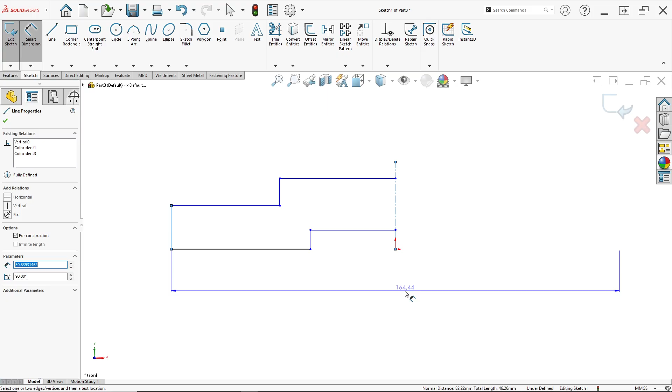We start drawing the first part here, the base plate. Start from the front plane, right click and click sketch. Draw a center line here to here, then select line and draw the shape. Set the total length dimension to 128 millimeters, so this to the center line is 128 millimeters. This line to the center line has a distance of 38, and this edge to this edge is 50 millimeters.

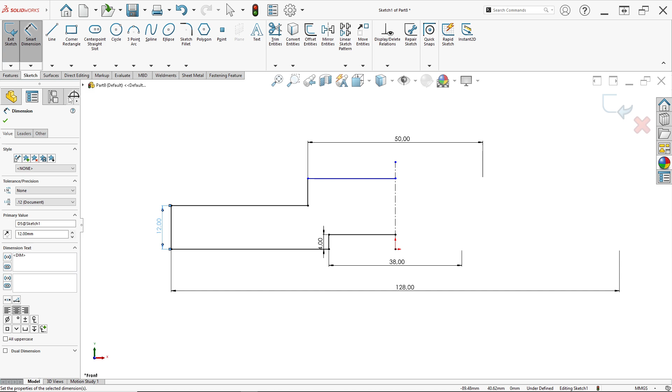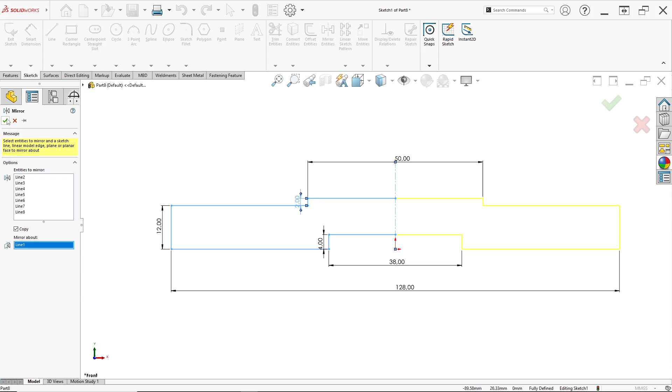This edge has a height of 4 millimeters, and this has a thickness of 12 millimeters. This line is 12 millimeters. Click OK, and the last dimension here is 2 millimeters. Click OK. We just sketch half of this part because after this we can use mirror entities. Click mirror, select all the lines, left click and hold, mirror about the center line, and click OK. That's the first step, it's simple.

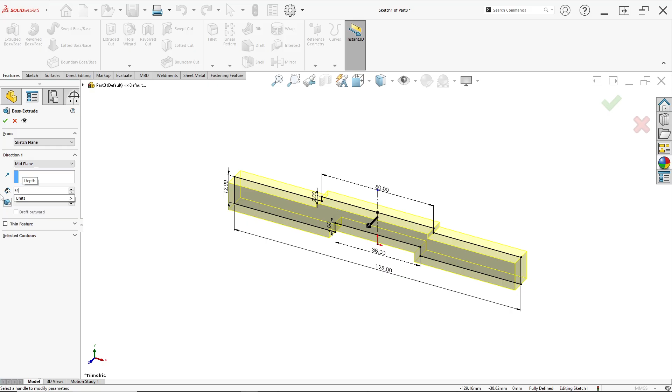After that, select feature and click extrude boss or base. For direction, ensure mid plane is selected for symmetry, and the total thickness here is 54 millimeters. Input 54 millimeters and click OK. Don't forget each corner has a fillet radius of 10.

Select fillet, 10 millimeters, for this corner, this corner, this corner, and this corner. Click OK.

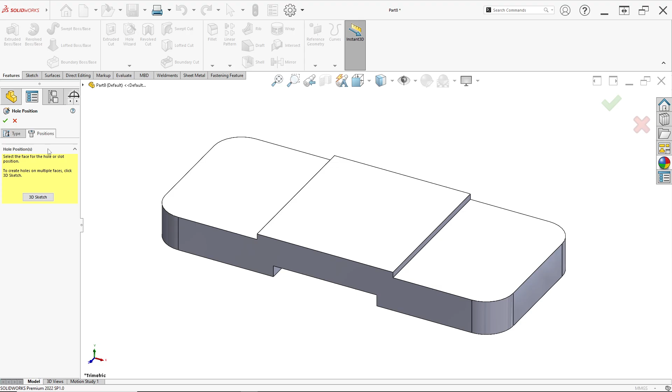Here we have 4 holes with diameter 10. We can make holes using hole wizard, click here. Hole type: click hole, standard ISO for example, and drill size: diameter 10 millimeters, end condition through all. For position, click 3D sketch and select this center, this center, this center, and this center. Click OK and done.

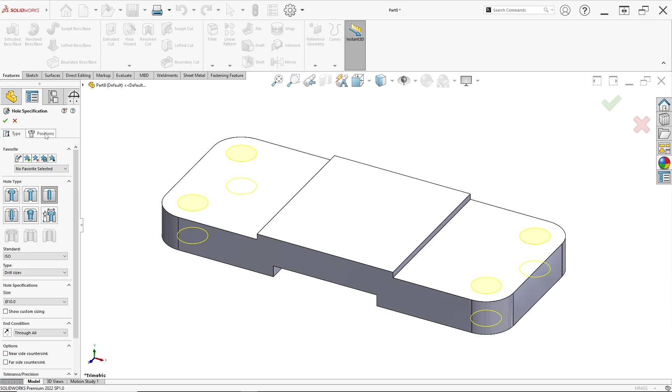We can check the position again in the feature. This center to the center of the hole is 108, which is correct, and this center to the center is 34 millimeters, which is also correct.

After that we can change the color, maybe to blue. Click OK.

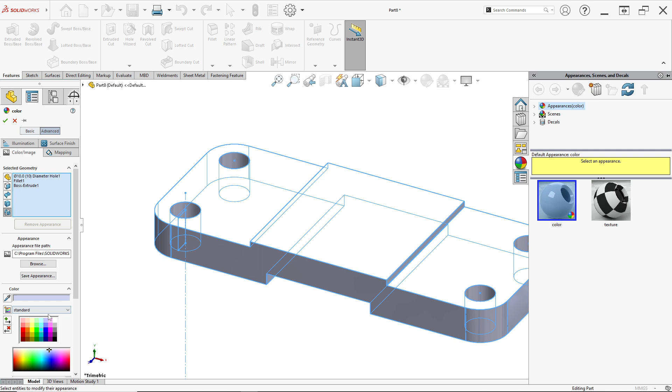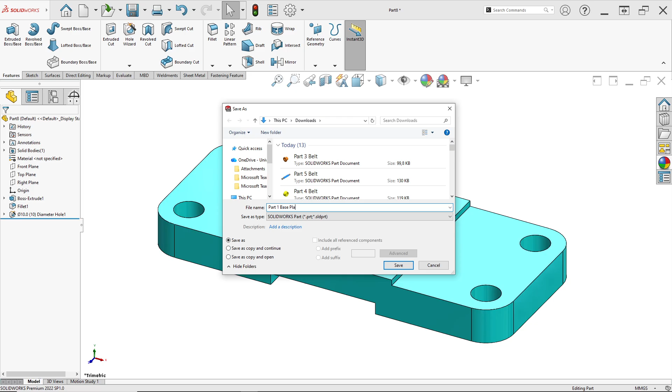The first part is finished. We can save this part as part 1. Maybe name part 1 as base plate. Click save.

Then we can make another part. Click new, click part, and click OK. For background we can change to plain white, and we can draw this part, the bracket. Start from the right plane and click sketch.

Draw a line from this point, this, this, this, and this. For the length, this part is 39 millimeters. For thickness, 8 millimeters here, and this is 4 millimeters. So for this line, 8 millimeters.

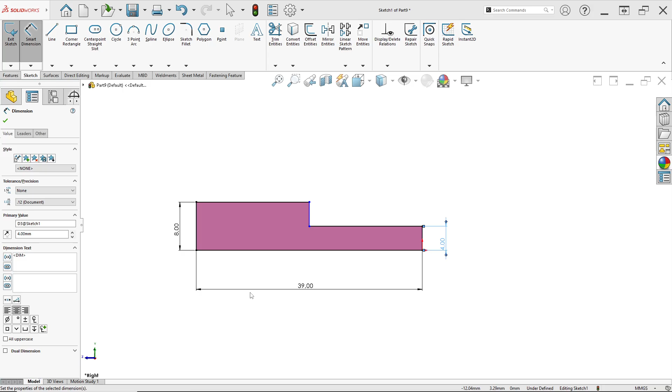It's the first sketch. Click feature and click extrude boss or base. Direction in mid plane and total width 54 millimeters, input 54 millimeters, direction mid plane, click OK.

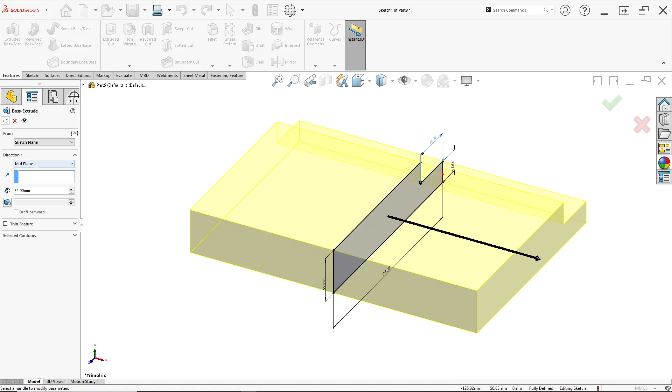Don't forget to select fillet for this corner and this corner, radius 10 millimeters. So here we also have holes with diameter 10.

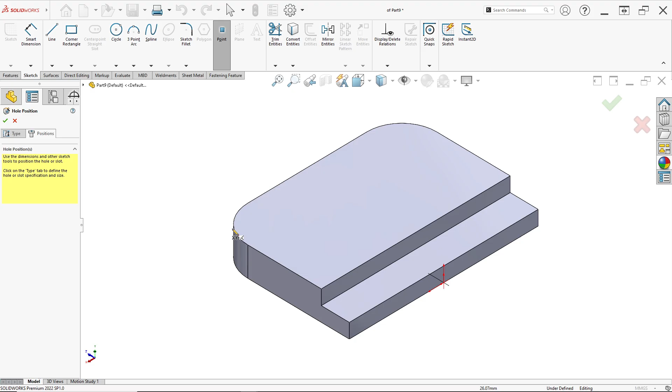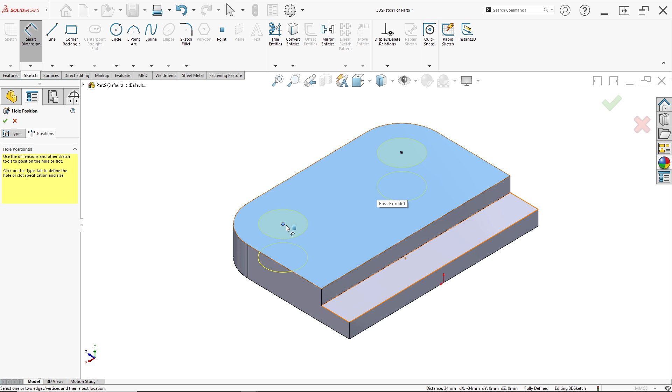Like before, click hole wizard and set hole size to 10, through all, position. Click 3D sketch, this center and here this center. The dimension 36 here is incorrect because the correct distance is 34. Sorry, that dimension was incorrect, actually the distance for this center is 34. Okay, just click OK and done.

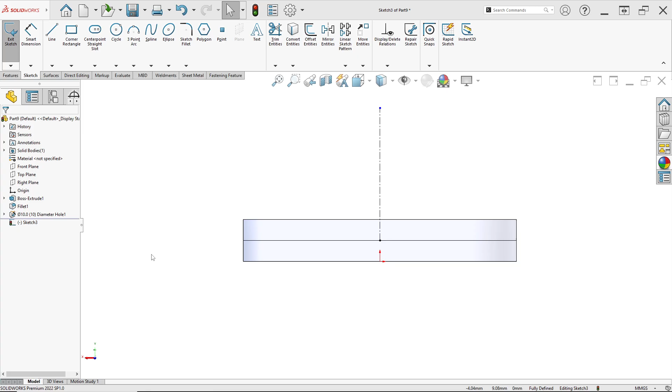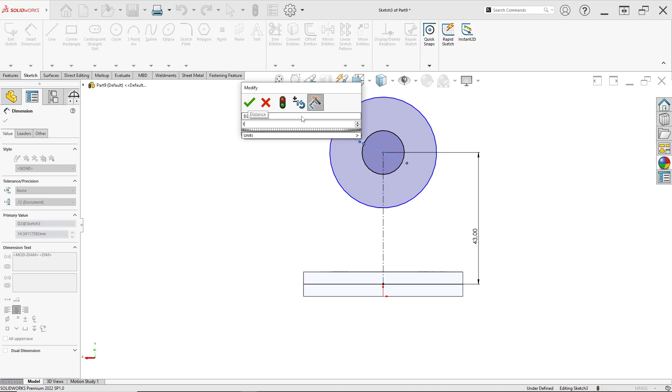So within 43 millimeters, make the circle here with diameter 10 for the hole, and an outer radius of 14. So first the hole diameter is 10 millimeters, and this circle has a radius of 14, so the diameter is 28 millimeters.

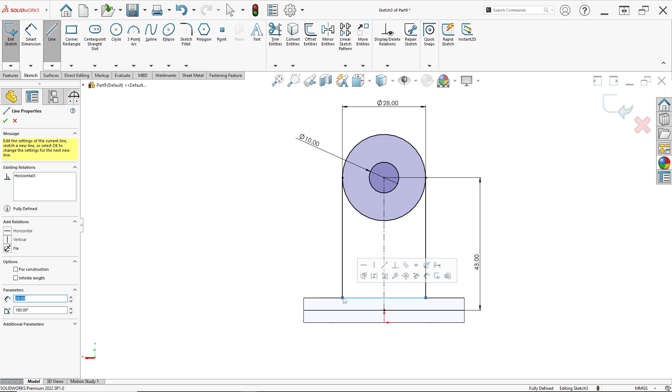Select line again and draw this to this, then draw this to this, and connect this point to this point. Ensure this line, hold Ctrl and select this circle, click make tangent. This line, Ctrl and click this circle, click make tangent.

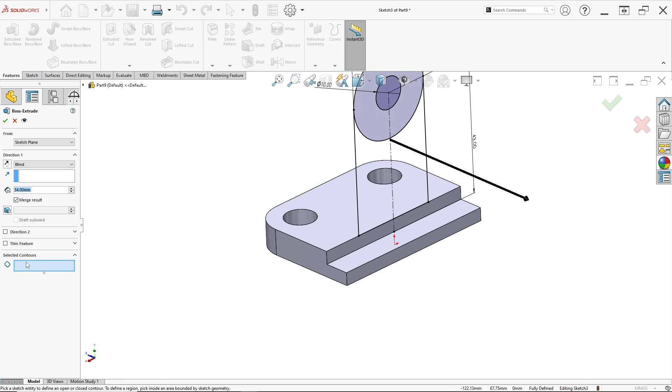Just click feature and click extrude boss or base. For direction, change to blind, and for selected contour, click this sketch and this sketch. Reverse direction to here, thickness 8 millimeters. Input 8 millimeters, click OK.

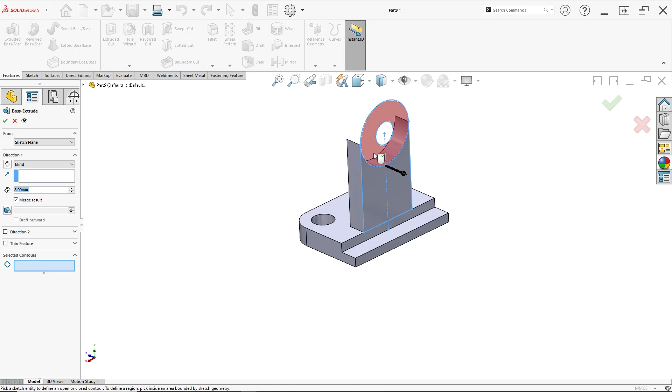We can click again on sketch 3 and click extrude boss. Click this circle, like this sketch, to make cylinder here. But you can change the offset because this thickness is 8, so input offset of 8 millimeters. Reverse direction here, and for length, 16 millimeters. Click OK and done.

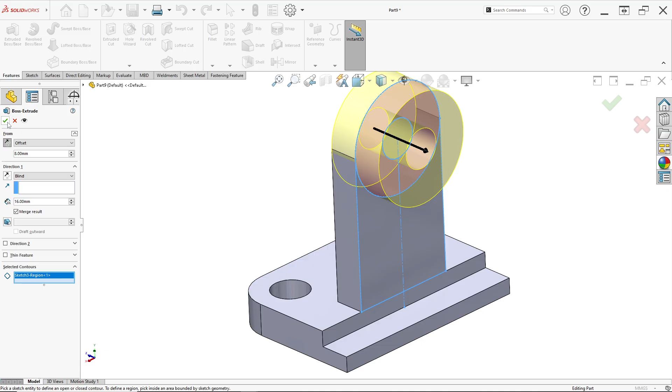It's simple. Don't forget, here we have a fillet. Click fillet, for example set 10 millimeters for this edge and this edge. Click OK.

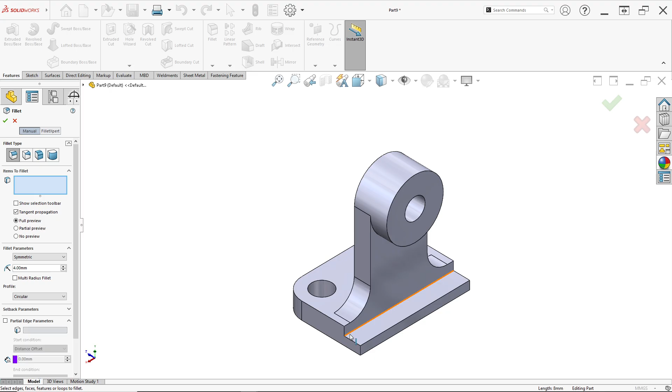And in here have fillet too. Just fillet, for example, I just set 4 millimeter for radius on this edge. Click OK. And last, we must make a rib here, thickness 10 millimeter.

So right click on right plane and click sketch, and draw from this point to this. Set distance from this to this point at 10 millimeter because it's in the center. So automatically this point to this face is 10 millimeter.

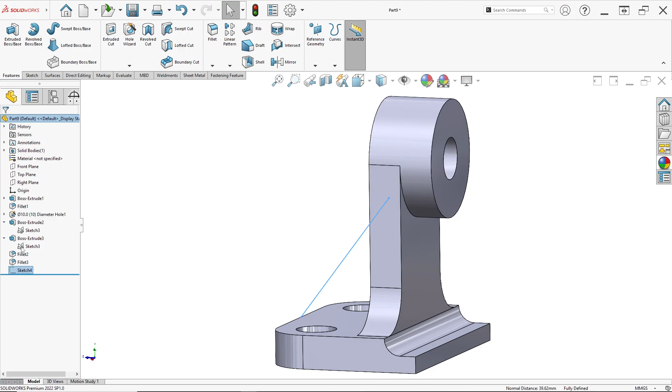Okay, like this. We can exit sketch first. We can check the first dimension in sketch 3. Okay, sorry, in here we can delete it, it's incorrect because the distance from the center to this face is 43 millimeter.

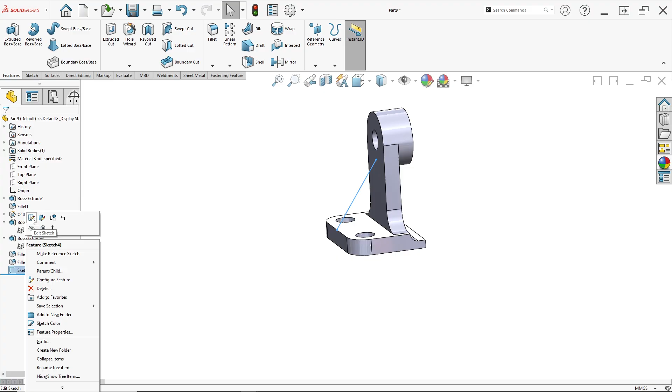At 43 millimeter, click exit sketch and edit sketch 4 again. Right click and click edit sketch, 10 millimeter. Automatically this point to this edge is 33. It's correct like this. Click feature to make rib and click rib.

In here direction is correct but thickness is 6 millimeter. Click OK and done, like this. It's so simple. We can save this part.

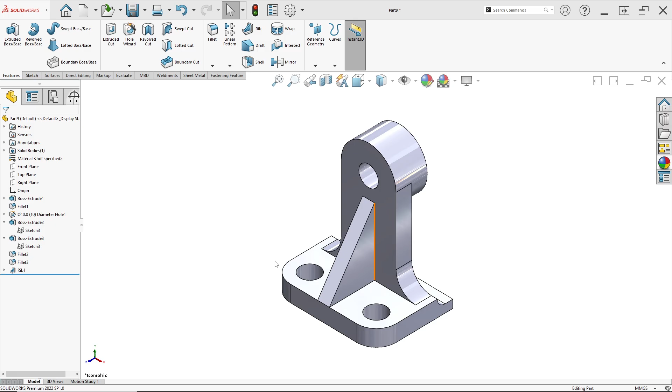In here, like this, we can save. Before save we can change this color, this part of the bracket. Maybe this color. Click OK.

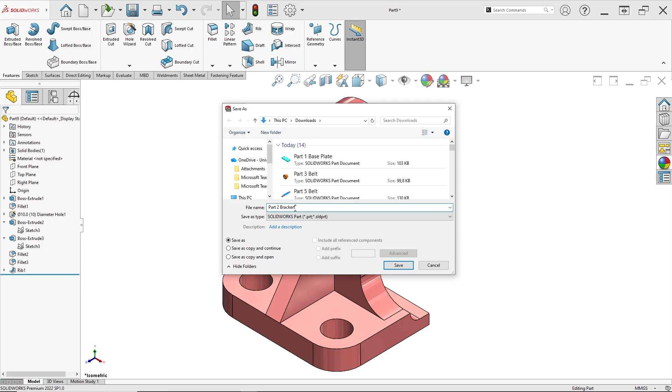Save this part. Save as. Save part 2, the name is bracket, brackets, like this. Click save.

And we can click new again and click part. Click OK. For background, change to plain white. We just make a bushing in here. We have the same bushing, so we just make one here.

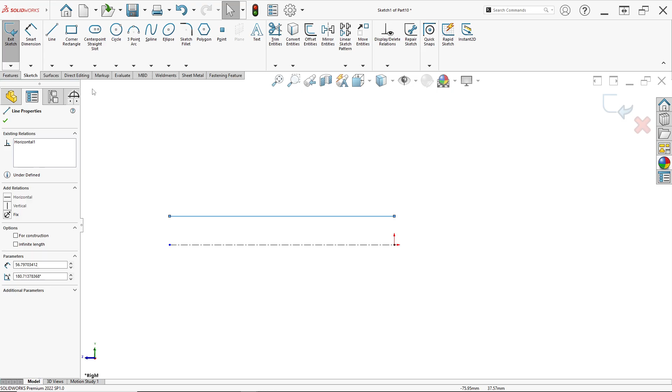So right click on right plane again and click sketch. Draw center line from this to this and draw a line here. Sorry, ensure this line, click make horizontal, click line again, this to this.

Okay, click make coincident, like this, to make the sketch like this, and set the length in here, the length in 20 millimeter. Just input 20 millimeter.

Then we can see here have outer diameter 30. So this line to the center line, diameter 30, and in here the hole is 12. So this to the center line, 12 millimeter, like this.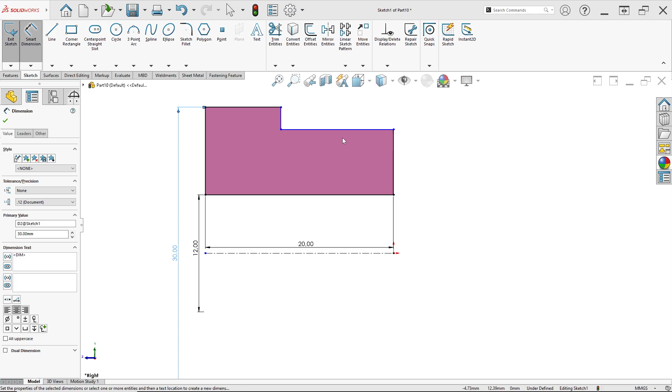Then here have diameter 20. So this to the center line, 20 millimeter, like this. And here have thickness 6. So this line has 6 millimeter, like this.

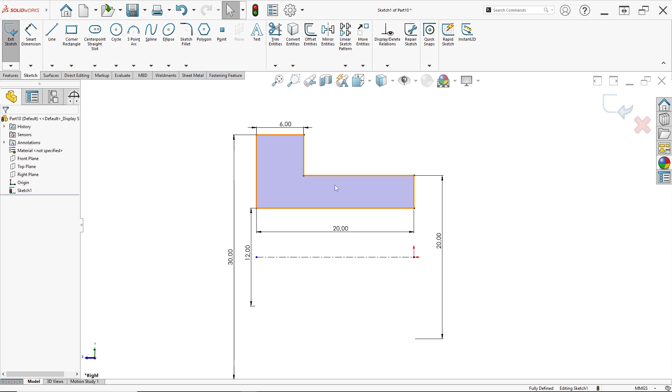After you input all dimensions like this, just click feature and click revolve boss or base. Axis of revolution automatically on this center line. Click OK, and done, like this.

It's part 3, the name is bushing. We can change this color, maybe brown, like this, and click OK.

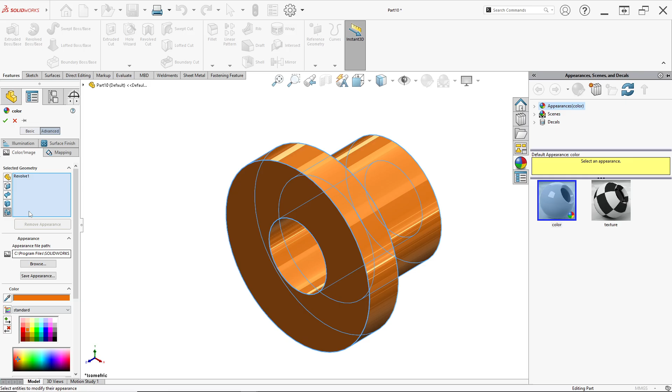Click save as, part 3, bushing, like this. Click save.

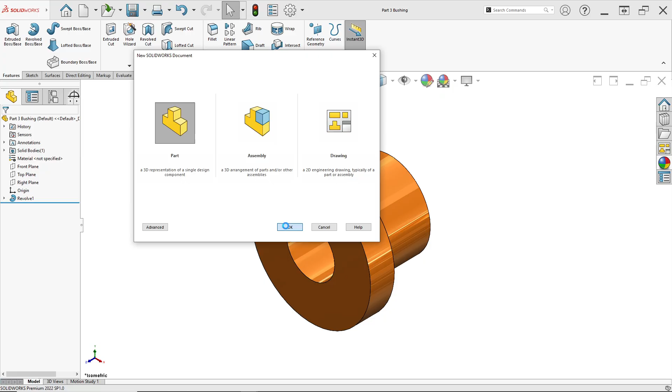Now we can make another part. Click new and click part. Click OK. Background plain white. We can make this part.

The name is roller. So we start drawing from the front plane, right click and click sketch, and draw center line from this to this, and this, like this.

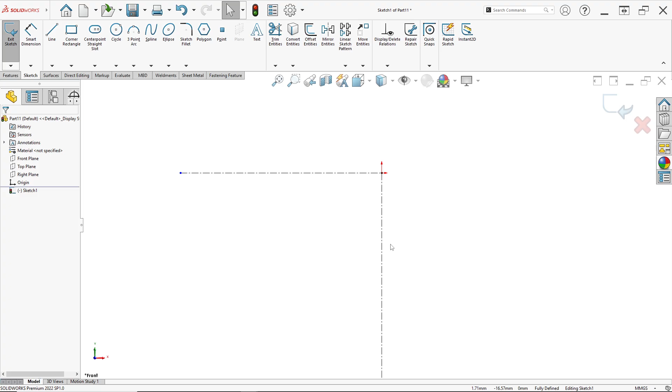In here outer have diameter 60. So this to this center line have distance or diameter 60 millimeter, like this.

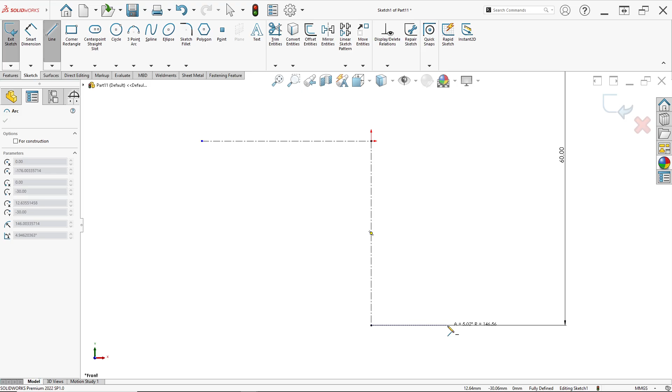And start drawing, draw a line here to here, to make the roller like this and this. Ensure this and this point, click Ctrl and click make vertical.

This line and this line, click Ctrl and click make equal. Then we can set the dimension, this line to this center line have width 10 millimeter, like this.

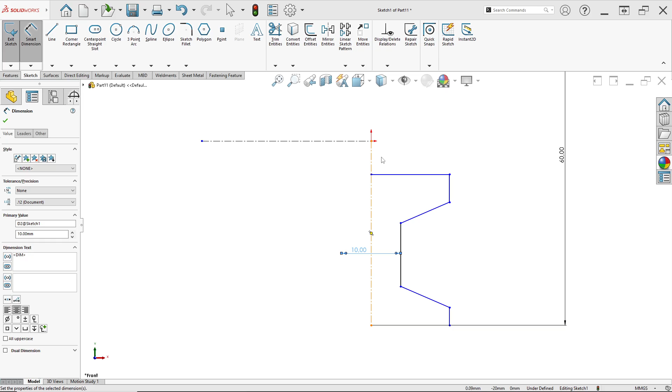And here 30, this line is 30 millimeter from the center line, like this, and this line width is 7.

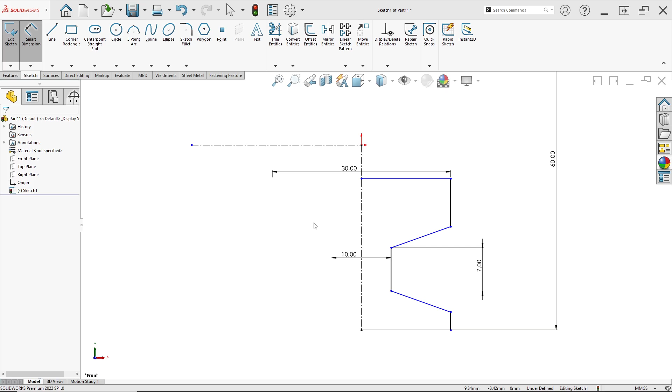Like this. Then set the dimension, first edge here has diameter 20, so this line to this center line input 20 millimeter, like this, and this point and this center line here, this edge has diameter 30, so input here 30 millimeter.

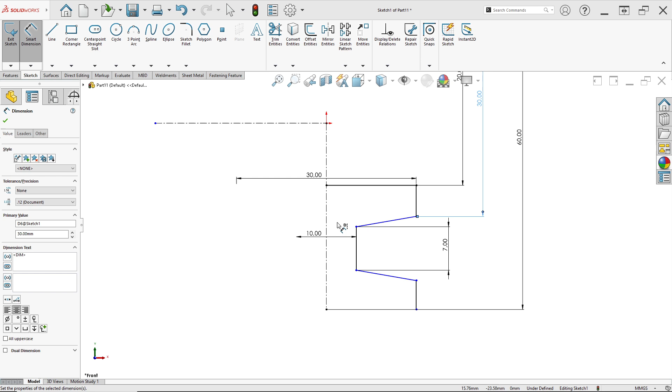And here this edge diameter is 52, so this point and this center line input 52 millimeter, like this. So ensure this point and this point, click make horizontal and connect this point to this point, like this.

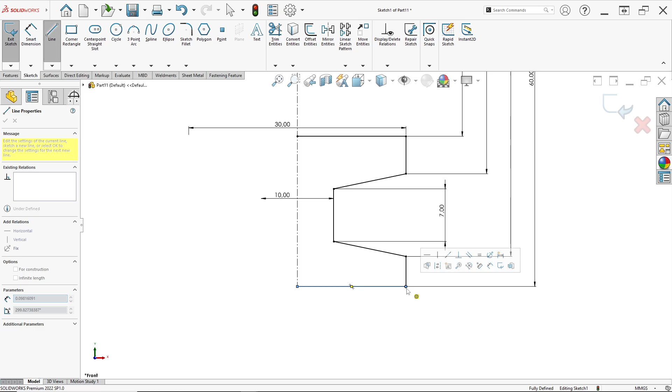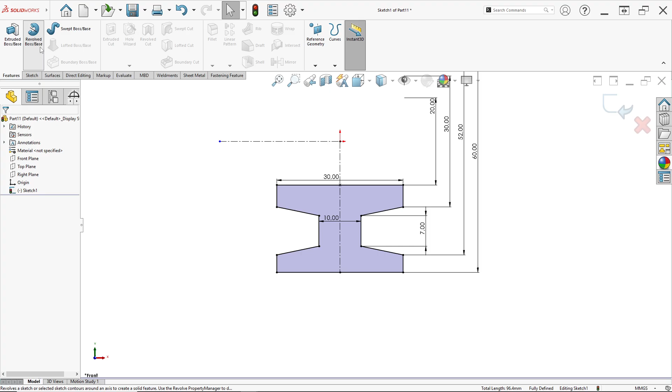After that, after we input all dimensions like this, appropriate this drawing dimension, we can select mirror entities. In entities mirror, left click and hold, select all lines here, and mirror about, just click this center line. Click OK, and we can select feature, click revolve boss or base, and for axis of revolution, click this center line.

Click OK, and then we can see from section view like this for this roller. Okay, it's so simple to make this roller.

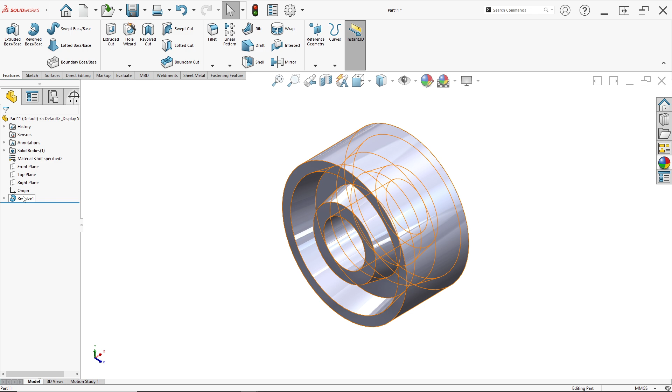We can save. Before save, we can change this color of the roller, maybe yellow, and click OK. Save as, part 4 is roller. Click save.

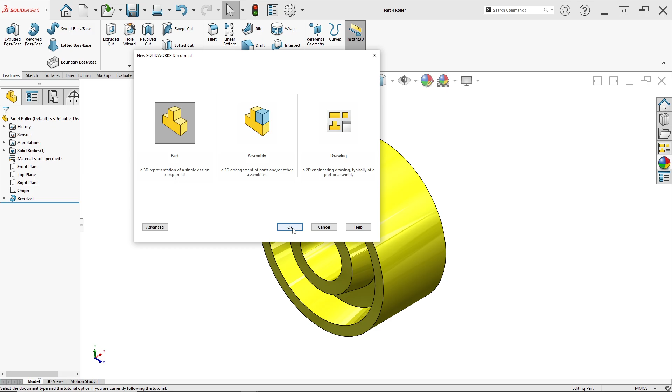Then we can make new, click part and click OK. Plain white for background, and for the last part in here is shaft.

Okay, just right click on right plane and click sketch. To make the shaft, make center line again, draw to this. The length of this part is 82 millimeter, and select line, draw.

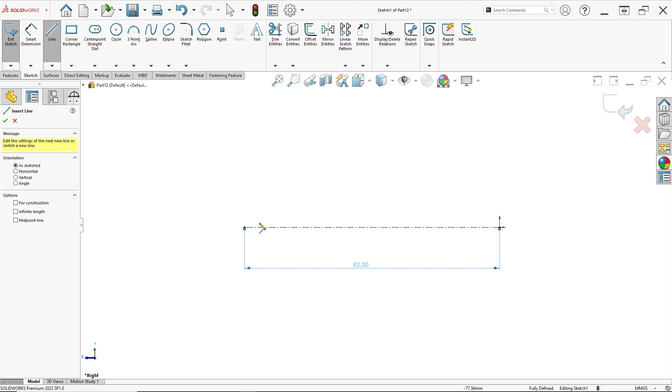This, and this. Ensure this point, click Ctrl, and this point, click make horizontal. This line, click Ctrl and click this line, click make equal.

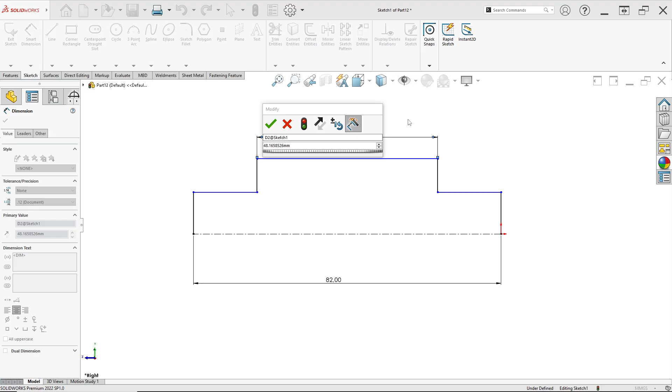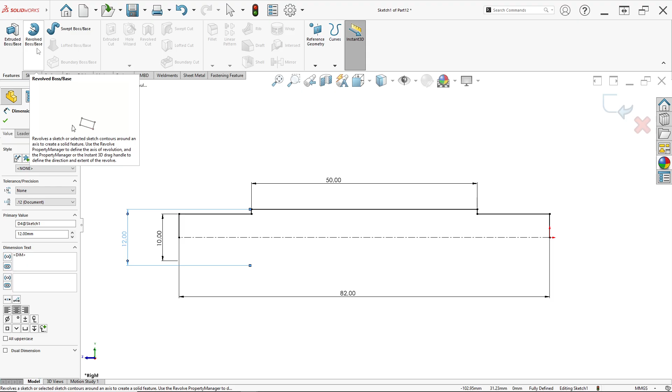Just click feature again and click revolve boss or base. Click yes. Automatically the axis of revolution is the line bar or center line here. Click OK, and then we can change this part's color, maybe to gray.

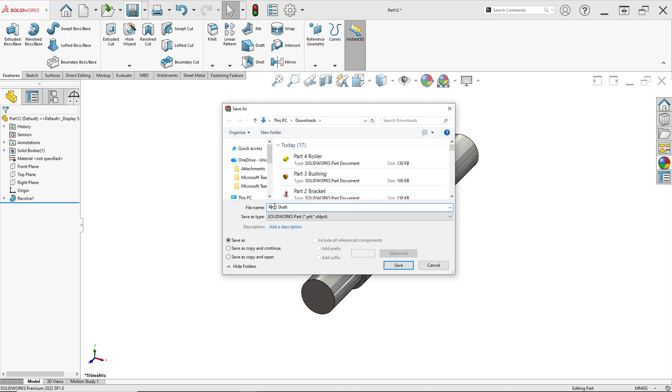Click OK, save this part. Save as part 5, shaft. Okay, like this, click save.

Now we just make all parts, because this bracket and this bracket have the same dimensions, and this bushing and this bushing have the same dimensions. It's just 5 types of parts for this belt roll support.

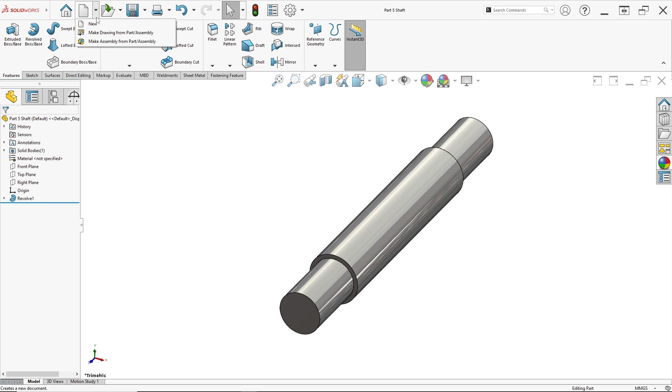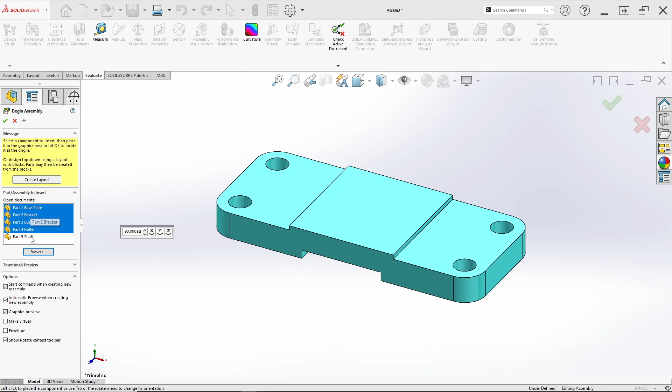After we make all the parts, we just click new and click assembly, click OK. Here we automatically have part 1 to part 5. If they don't appear, just click browse, and you can see and select all the parts, just click open. Here the parts, part 1 until part 5, just select all.

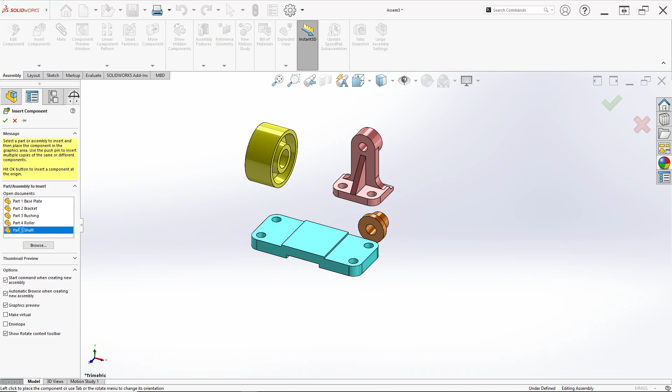Insert part 1, we can input manually like this, and here part 4 and part 5, and don't forget part 5 shaft here. We can change the background to plain white like this.

For the first part here we can click float, and for the base plate we can click assembly and click mate standard. From here we can click this face and click front plane, click coincident, click OK, and this face to right plane, click coincident, click OK.

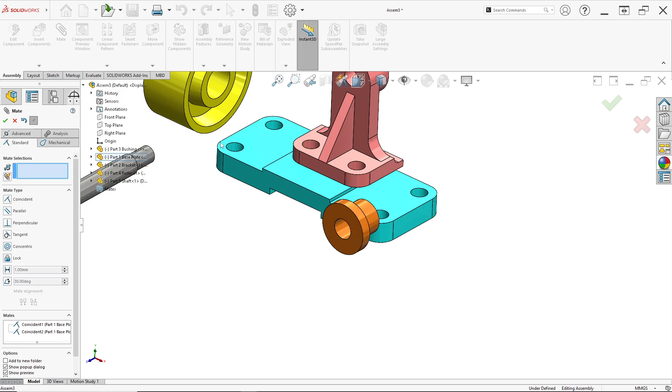Now here we have 2 brackets and 2 bushings, so we just left click and hold, left click and click Control on the keyboard and copy like this. It's so simple. For the bushing, click Control and left click, hold, and like this. This just copies this bracket and this bushing.

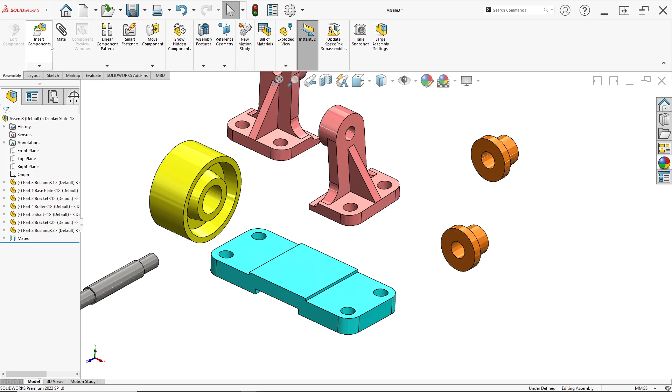So we can right click and rotate the part like this, and just click mate again. This face and this face, click coincident, click OK. This face to this face, coincident, click OK. This face to this face, coincident and click OK.

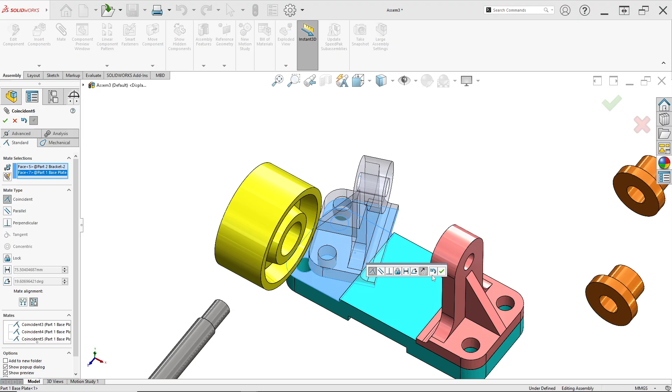We can repeat the same way here: this face to this face, click coincident, click OK. This face to this face, coincident and click OK. This face to this face, coincident and click OK. Like this, it's so simple.

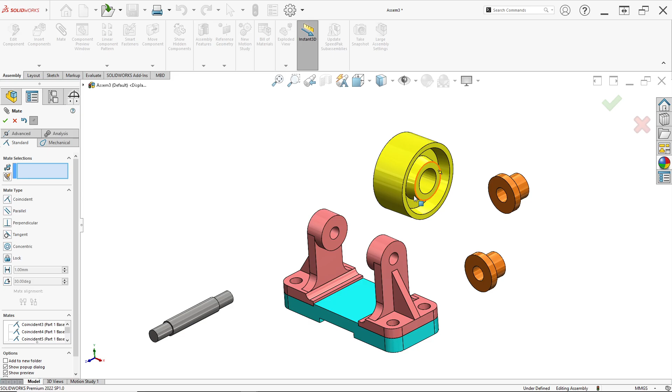Then here we can do the assembly of the roller and bushing. The way is simple here. This edge and this edge, just click concentric and click OK, and this face to this face, coincident and click OK.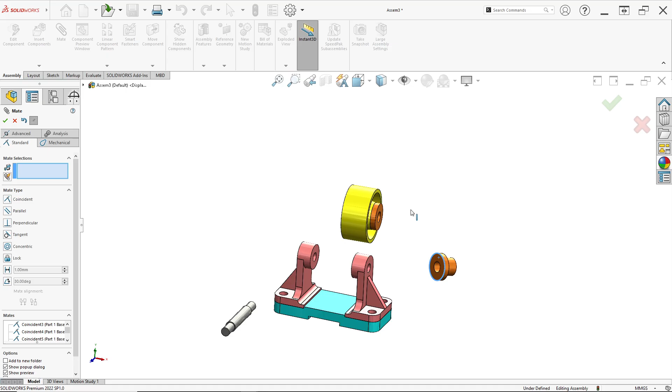And here, like before, this edge and this edge we can click concentric and click OK, this face to this face, coincident and just click OK.

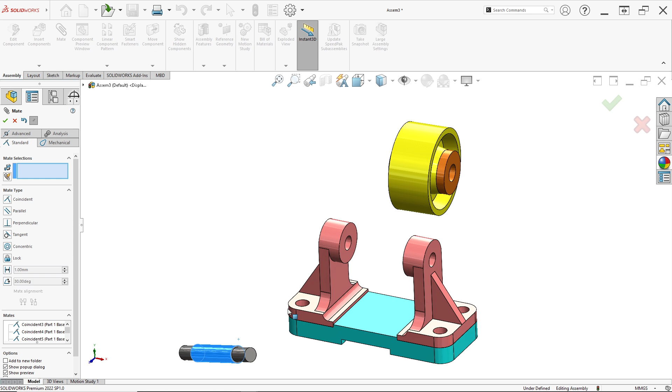Now we can input here for the shaft, like before. This edge and this edge, just click concentric and click OK. Now we must center this shaft in the roller.

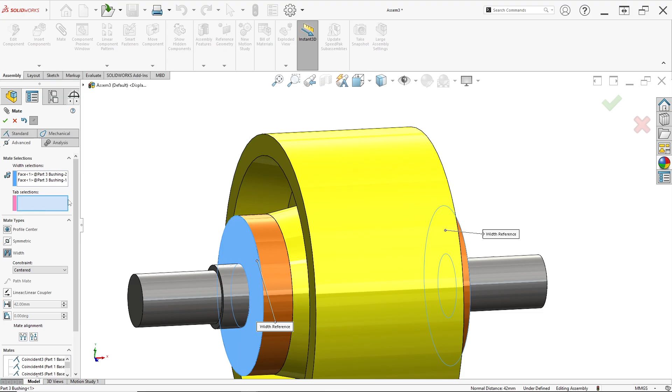The way is simple. Just click mate and change to advanced, click width, and ensure the constraint is set to center. For width selection, first select this face and this face, and for tab selection, click this face and select this face, then click OK. Now the roller is centered, like this. It's so simple.

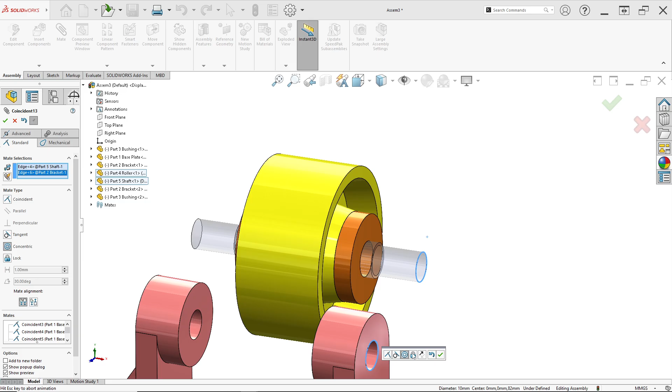Then click again, standard mate. For this to this edge, just click concentric and click OK. And this face to this face, click coincident and click OK, then click OK.

Here we can right click on this base plate and click fix, for example. Okay, now I can rotate it here.

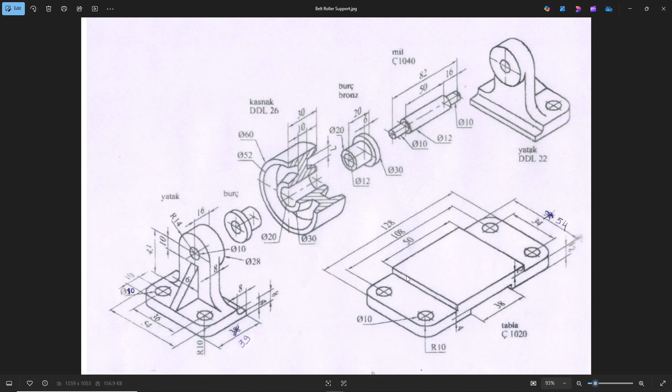Actually, for this hole here, you can add it maybe as a bolt, and you can edit it using the hole wizard before making the part. But here I followed making these parts simply, as an exercise to build the roller support like this.

We can make an exploded view here in the configuration manager, right click here and click new explode view. For the first step, you can select this base plate, direction X, Y, Z, maybe Y here like this.

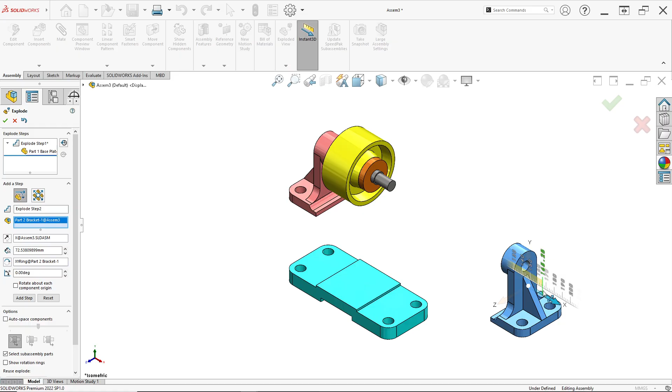Click done, and for the second step, here until here, click done. This bracket, so here until here, click done, click this off.

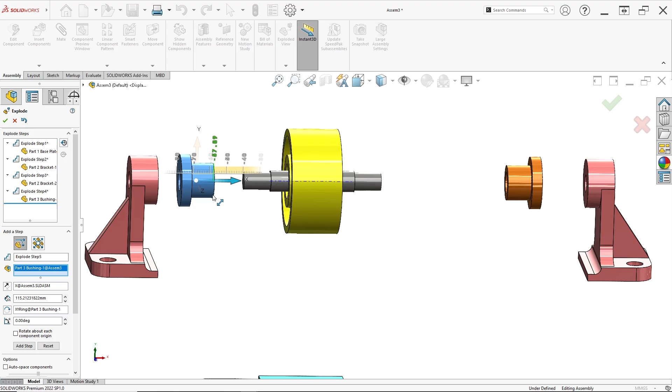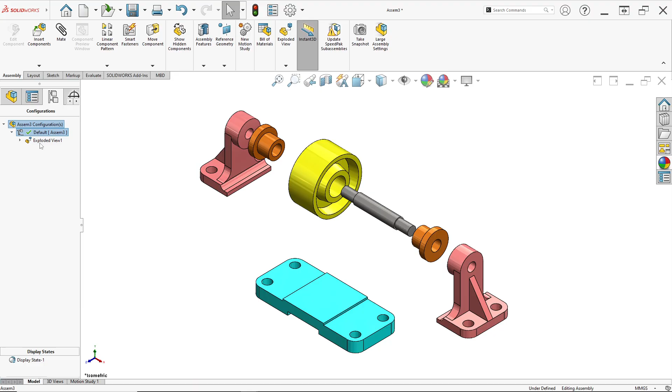Now we have the explode view. We can animate it with right click, here, click here and right click, click animate collapse like this, and we can right click and animate explode. Okay, we can animate collapse again.

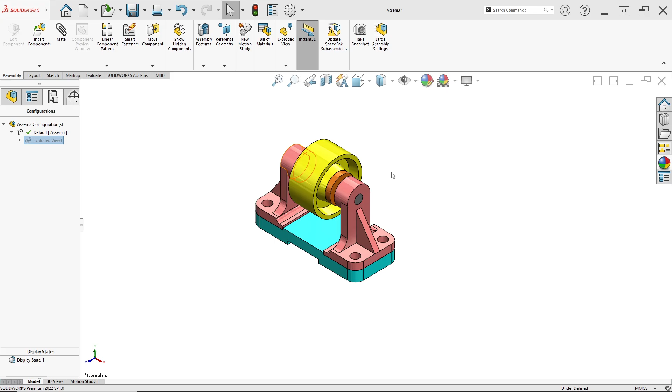It's a simple exercise to make all the parts and assemble the roller support in SolidWorks. It's perfect for a beginner exercise to learn SolidWorks.